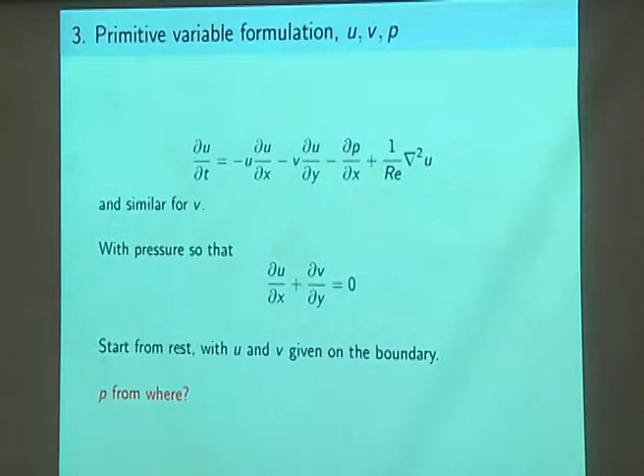So now we're going over to what's called the primitive variable. It's the original variables of velocity, u and v, and pressure; in this two-dimensional problem, just u and v. So you know the momentum equation. I've written it all out for u. There's the same equation for v. And the pressure, which is in the momentum equation, its job is to make sure the flow is incompressible.

Because we can think about compressible flows where depending on how much compression there is, you get a pressure. Pressure is a function of density and temperature. And so the divergence of the velocity is the compression or expansion, dilation, and that is what determines the pressure. Except there's not a local relationship, it becomes a global relationship. You need the whole pressure field that makes sure the divergence of the velocity vanishes at every location.

Okay, we start from rest. We know the boundary conditions on the velocity: 0 on the bottom and two sides, 0 for vertical velocity on the top, and a given tangential velocity on the top. So where do we get the pressure? Well, one answer is find an equation for the pressure. And we can find an equation for the pressure from the fact that the divergence vanishes, and so the divergence of the time derivative of the velocity vanishes. We know the time derivative of the velocity from the momentum equation.

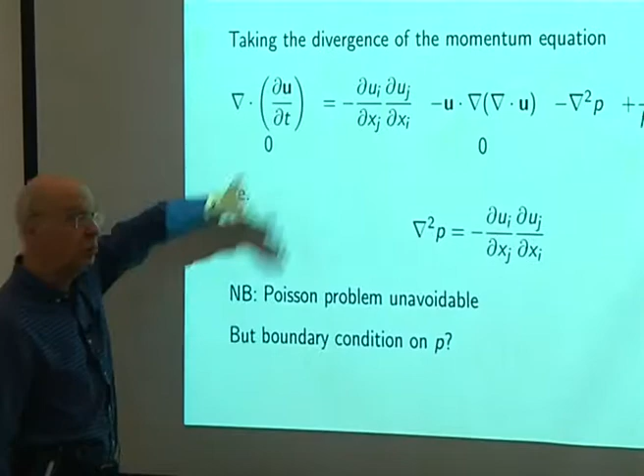So if we take the divergence of the momentum equation, we get a mess. So here I've got the time derivative of the velocity is u dot grad u, gradient of the pressure and del squared u. If I take the divergence, du by dt is easy. Divergence of the pressure gradient is del squared p. Divergence of the Laplacian of u, del squared u, is the Laplacian of the divergence of u.

And then there's the awkward u dot grad terms. When you take the divergence of them, there's going to be a u dot grad of the divergence, but then we have to differentiate also the first term, and that's what all this is with subscripts, the summation over i and summation over j. Now, so that's just the divergence of the momentum equation.

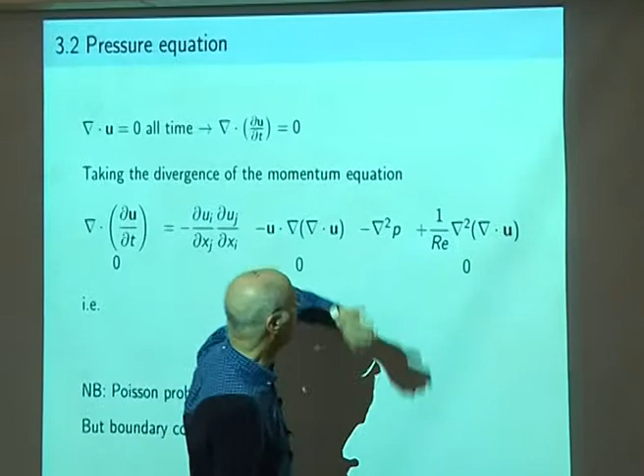We know the divergence of the velocity is 0. So we know the first term, left-hand side, is 0. We know the far right term is 0. We know this term is 0. So we've just got del squared of the pressure is this cross gradient, this cross product of the velocity gradient. Right, so good, we've got an equation for the pressure.

You notice the equation is a Poisson equation. You just can't get away from a Poisson equation. So in stream function vorticity, you've got a Poisson equation. In primitive variable, you've got a Poisson equation. And that's the thing which takes all the computer time. And it's unavoidable. Think of another formulation, and you'll have the Poisson equation there.

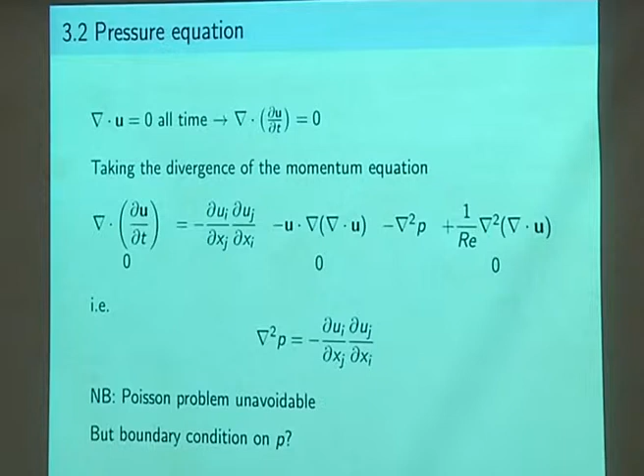So, right. So we've got an equation in the interior. What boundary conditions are we to apply? And you have to think about it carefully. And quite a number of people don't think about it carefully. So this is the answer: you go to the momentum equation and see what's happening. So let's look on, here's our square box, and we've got x and y. Let's look on x equals 0, this boundary.

On this boundary, we have no inflow, so u is 0 there, and u is 0 all the way along this boundary. What is the momentum equation at a point on the boundary? Well, here's the momentum equation: du by dt plus u dot grad u is minus gradient of pressure plus nu del squared u.

And on the boundary, x equals 0, u is 0. So the time derivative of u is 0. U is 0. The x derivative of u isn't 0. The velocity in this direction actually does increase away from the boundary. Well, it actually doesn't, but never mind. So I don't want to know.

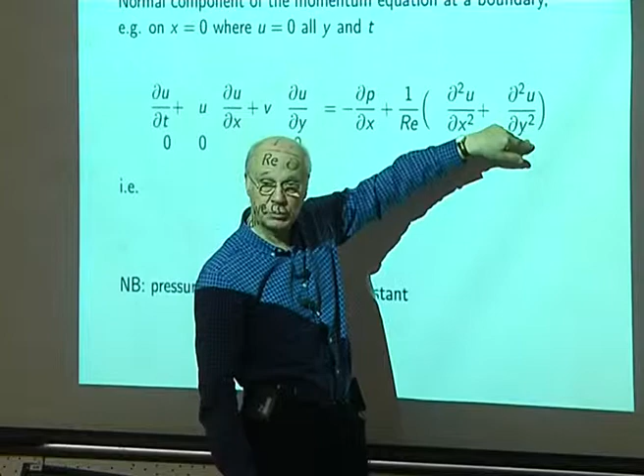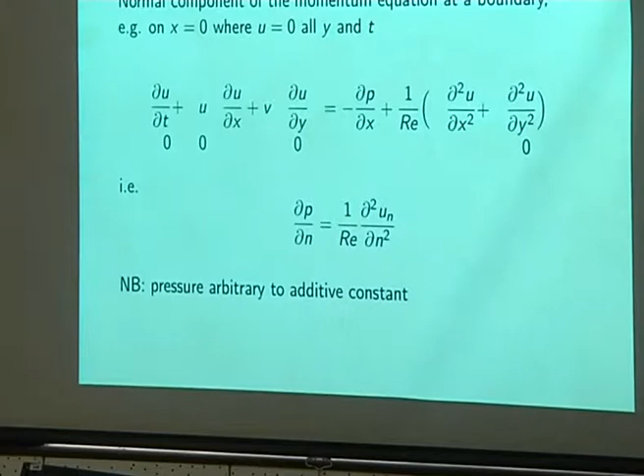This is 0. U vanishes at all values of y, and therefore the y derivative of u vanishes. Equally over here, u vanishes at all values of y, so the second derivative of u with respect to y vanishes. So I've got all these zeros, and what have I got left? I've got the pressure gradient and two x derivatives of u. So when we've put all those to 0, we've only got two terms left, these.

So this is the x derivative of the pressure out of the wall is equal to two x derivatives of u out of the wall. And in general, I've just done this one boundary here, but it's true of all boundaries where there is no normal flow. If u is the normal velocity, we can generalize this to the derivative of the pressure in the normal direction being equal to two normal derivatives of the normal velocity. That's what we've got in this particular case, and it's true on all boundaries where there's no inflow.

If you've got an inflow across the boundary, then you actually have to tell me the pressure. How hard are you pushing the stuff in? Okay, so here we've got a boundary condition. You notice it's a Neumann condition. It's the gradient of the pressure. I don't know the value of the pressure. Pressure equals 1 everywhere inside the box, nothing happens. Pressure equals 10, nothing happens in the box. So there's an additive constant.

And that's a little problem when you'd like to plot out the pressure. It will have an additive constant, which is arbitrary. So as a little technique, if you want to compare one calculation with another, one resolution with another, it's a good idea to find the average value of the pressure and subtract it, so that you choose the additive constant so the average pressure is 0.

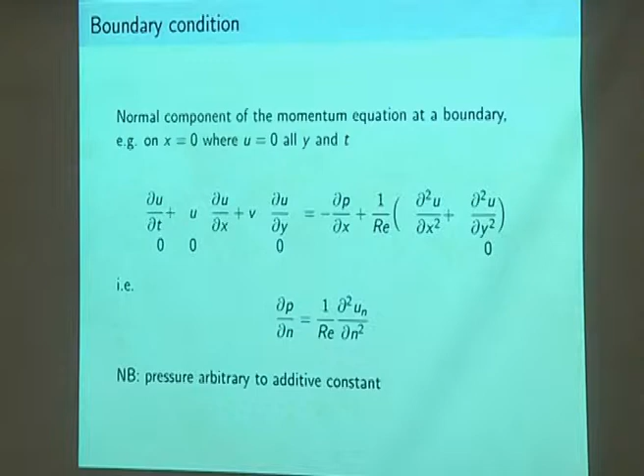Okay, so if we take that equation for the pressure, del squared P is du by dx, and the boundary condition, and solve that, what happens is a disaster. I'm plotting here as a function of time the error in satisfying div u equals 0. So we start with divergence of the velocity 0 initially, and it just climbs, and it goes to a non-zero value.

So solving the pressure equation with the pressure boundary condition gives me a flow with the divergence not equal to 0. It's a problem. The flow is also rather strange. It's not a flow that you can understand. The pressure field is pushing the flow around in a way that is not a proper way. Something's all gone wrong.

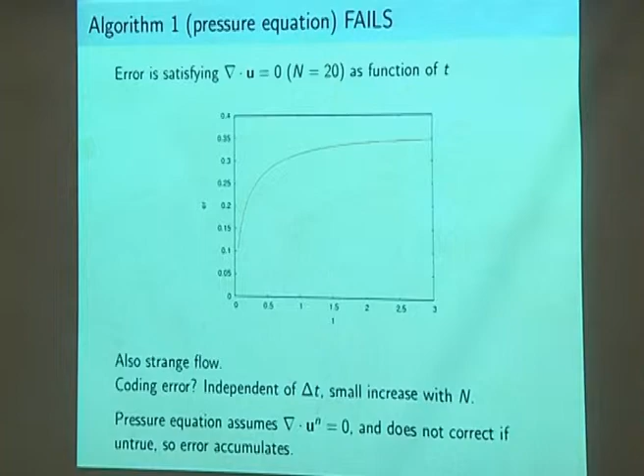So I thought, have I made a mistake when I first did this? Did I make a coding error? So you check the coding, no problem. Have I made a numerical error here? If I vary delta t, the answer ought to change. Doesn't. If I change delta x, does it change? Well, it changes a bit, but not by much, from 0.35 to 0.34. So we have a problem.

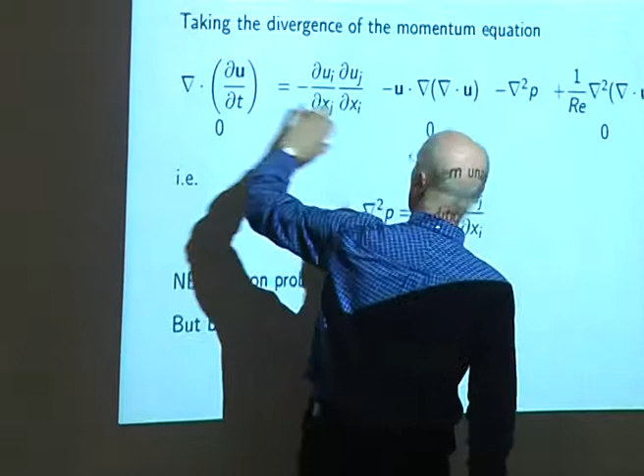The problem is that in our pressure equation here, we assumed div u is 0. Suppose we made a numerical error at some stage and it wasn't 0. This assumes it's 0 and it doesn't correct any error. So it actually has a nasty effect that the time derivative of div u is equal to del squared of div u. It may grow.

So if div u is 0, it's okay. But if div u isn't 0, then there's a problem. So little numerical errors have accumulated, and we get a nonsense answer. So that didn't work. Okay, so I have to think again.

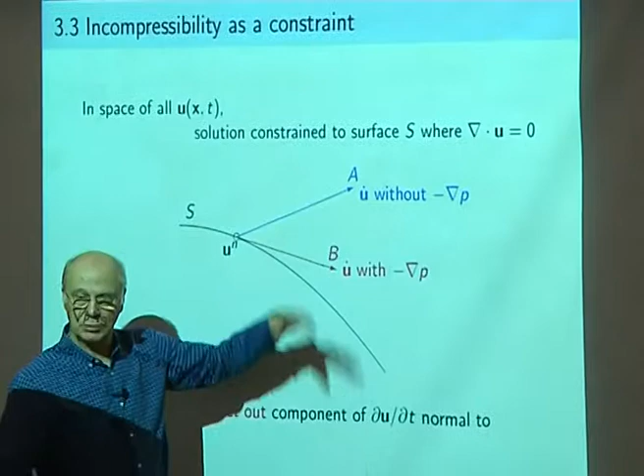And I mentioned at the beginning, the pressure field is the Lagrangian multiplier associated with the constraint of div u is 0. Let's think about it in a general sense. Out of all possible velocity fields, which I can only represent in 2 dimensions, there is some surface, some restricted set of velocity fields, this black surface here, where div u is 0. Off this surface S, the divergence of u is not 0.

So we start at some time level on the surface, hopefully, and then, without any pressure field, the time derivative of the velocity would take us away on the blue curve. And what the pressure gradient does is remove the component normal to the surface and put us parallel to the surface. So if we add the gradient of pressure, we move on the red line, which is tangential.

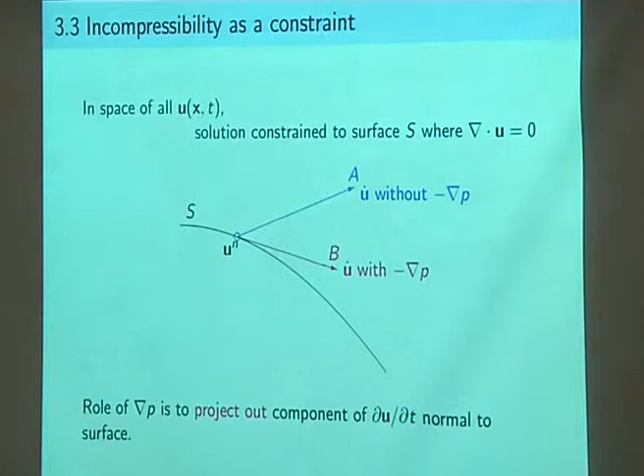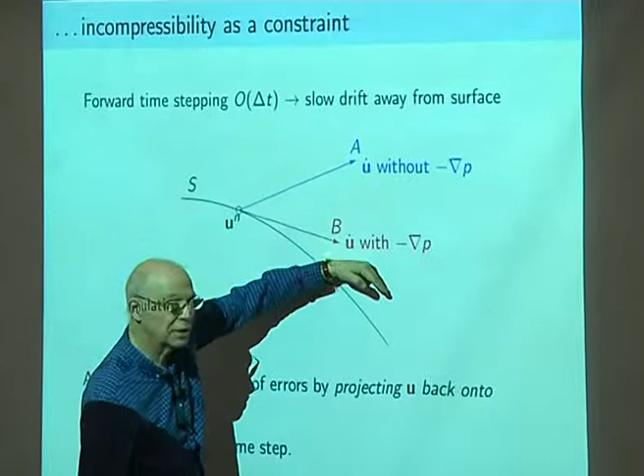So the job of the pressure field is to keep us on div u equals 0. Right, except if we have a first order time stepping method and we move in a tangential direction, we've come off the surface. And if we move in a tangential direction again, we slowly drift away. And we have to do better than that.

So just doing simple time stepping and getting the correct direction that's in the direction of keeping div u equal to 0 is not right. We want to come right back onto the surface. So this is point C. So we don't go off on the tangential direction. On this curved surface, we have to end up here.

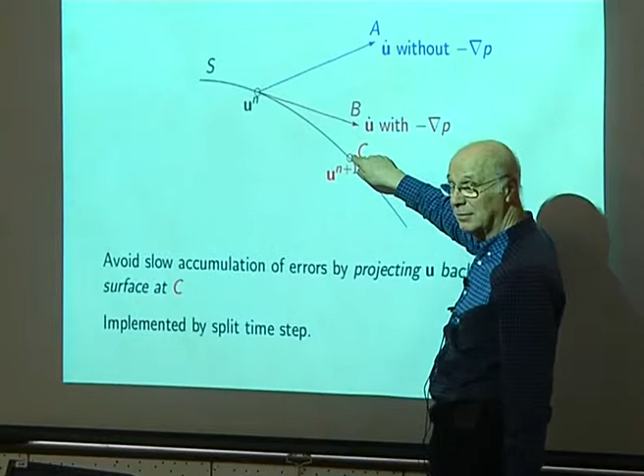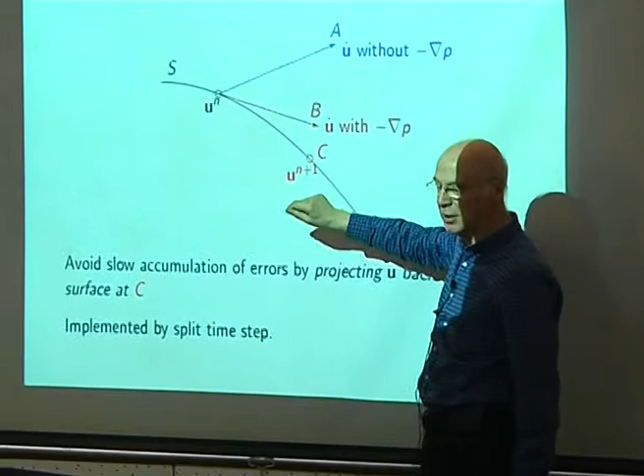So at the end of the time step, we don't mind even if we started off the surface. We have to make sure that at the end of the time step, we're back on the surface. So we correct previous errors. Okay. So that's the idea. And the way it's done is by a split time stepping method.

So you first make a time step from time level n, start over here. Time level n, you make a time step forward to this intermediate starred velocity field, which doesn't have any pressure field. This has just got u dot grad u, del squared u. The grad p is not in there. So we make a time step off the surface without the pressure. And then the second part is to add to this the time step associated with the

gradient of the pressure. And the pressure you want is such that the divergence at the new time is 0. So I ask that the divergence at the new time is 0. So this divergence, this is 0. Divergence of the starred velocity is not 0. And that's going to be del squared p. So we get an equation, del squared p equals 1 upon delta t, the divergence of the

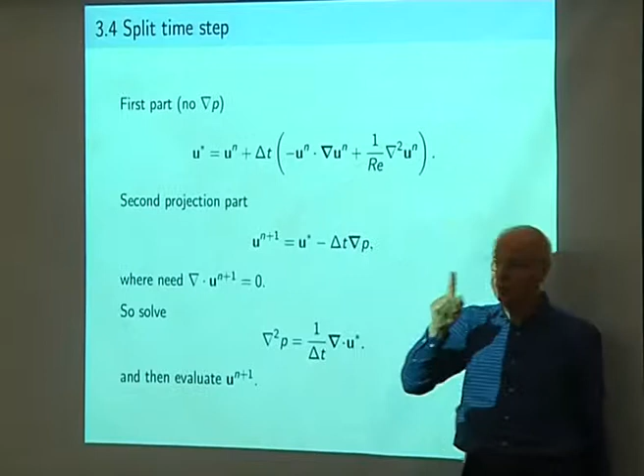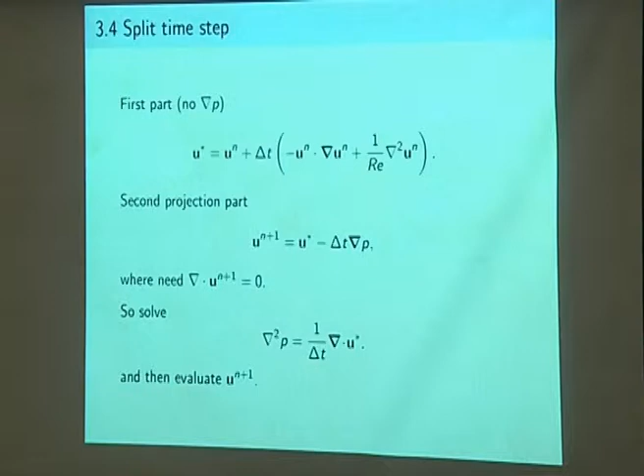starred velocity field. And if we can calculate that pressure from solving this equation, find out the pressure gradient, add it to the starred velocity, and we guarantee that divergence of time level n plus 1 is exactly 0. Okay? So this is self-correcting, previous errors get wiped out, and sounds great. Doesn't quite work, but it does eventually. This is a good idea.

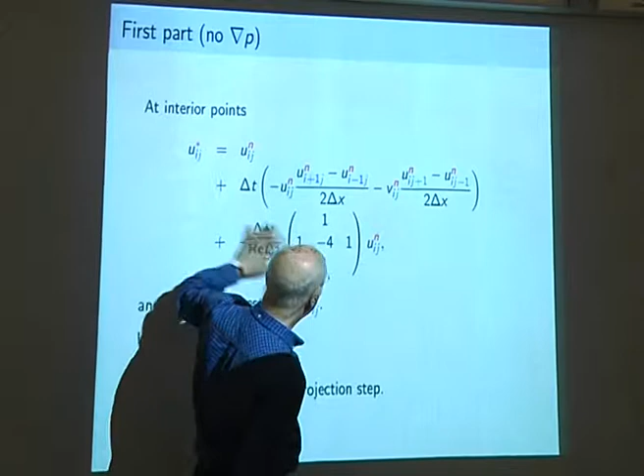So what we have to do is to work out del squared of the pressure. So here's the sort of code. It's getting slightly messy by now. So the starred velocity field without the pressure has u dot grad u, that's u du by dx, v du by dy, and then the Laplacian, this nice numerical molecule. So you can see here, the blue i's are the x variation. So this is the u du by dx, and then the green j's are the y variation. So this is du by dy.

Right. So let's get into the projection step. And then if we take that starred velocity field and work out its divergence, this is centrally differencing. This is the du by dx and dv by dy of the starred velocity field. That's the Laplacian of the pressure. We can solve the Poisson problem, and it sort of nearly works. The divergence of the velocity field that you get out of it at the next time step is nearly zero, but it's not quite zero.

So, to some extent, I originally said, well, this is wrong, because it was all designed to make the divergence at n plus 1, 0. It's only made a small error. There's a small error in the momentum equation. They go together. Let's live with it. But no, we're supposed to have done it exactly. So what's gone wrong?

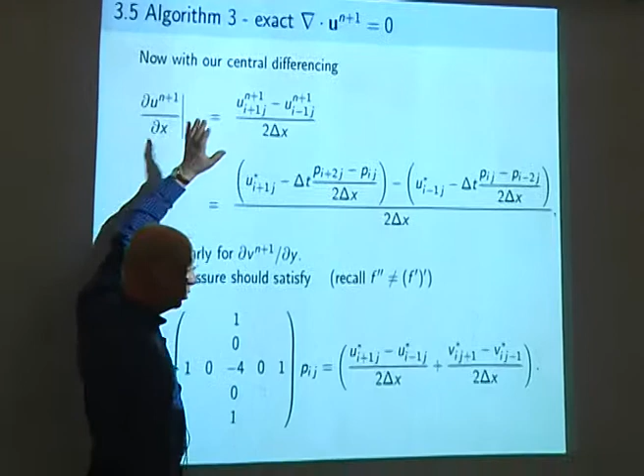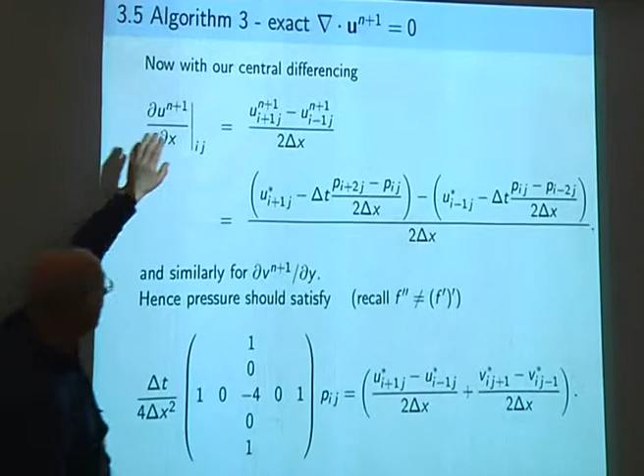Well, there are two terms in the divergence, du by dx and dv by dy. So this is du by dx, central difference. So it's i plus 1 and i minus 1 of the velocity at time level n plus 1. The velocity at time level n plus 1 is the star plus the pressure gradient term. This is the pressure gradient difference.

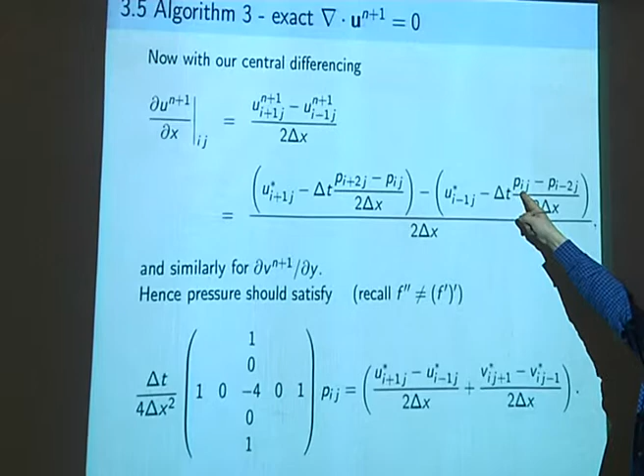And because I want the velocity u n plus 1 at i plus 1, I've got the pressure at i plus 2 minus the pressure at i to be central difference. To get the pressure gradient at i plus 1, I've got the pressure at i plus 2 and at i. And then the pressure gradient at i minus 1 is found from the pressure at i and pressure at i minus 2.

Okay, but you're supposed to follow this carefully. So to get the velocity at n plus 1, it's the star velocity plus the pressure gradient. And then I want this at i plus 1 and i minus 1. At i plus 1, the pressure gradient is i plus 2 minus i. Right. And there's a similar expression for v.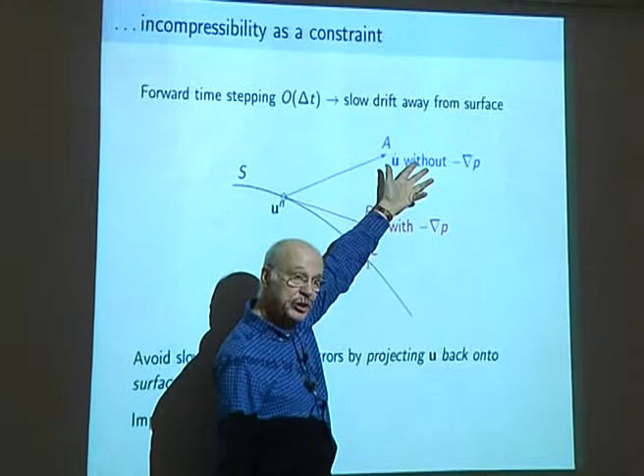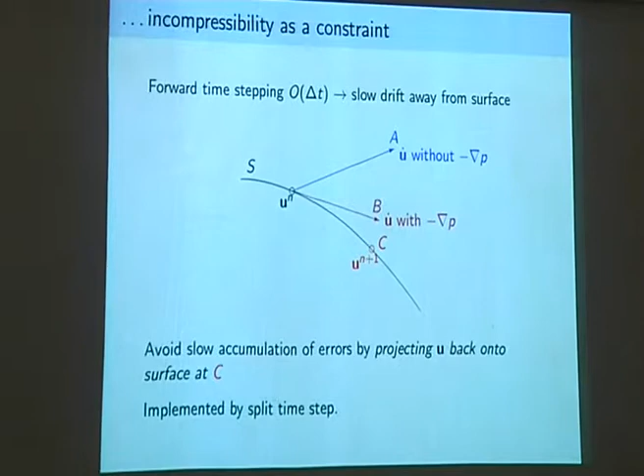So we first find out what the velocity is without a pressure gradient, and then we add a pressure gradient, not to be in the tangential direction, but to come down to here, which is div u, divergence of velocity at n plus 1, is 0. So the first one to star is to go from n and then make a delta t time step with no pressure gradient: u dot grad u and del squared u.

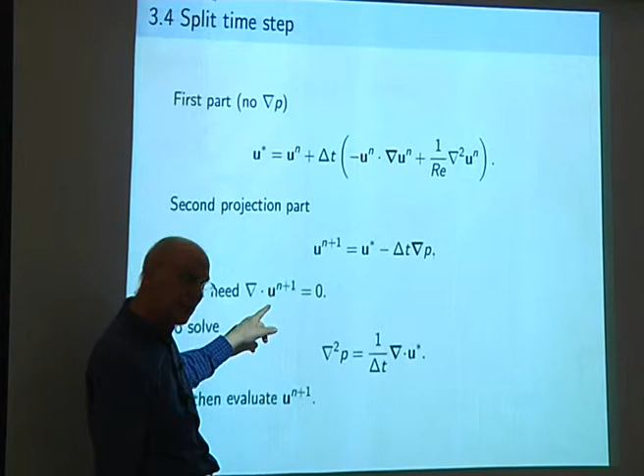And then the second step from star to n plus 1 has the pressure gradient in, and you choose the pressure gradient so that the divergence at n plus 1 is 0. Okay? And so divergence of that gives me del squared pressure, and this will be non-zero. Okay, so this split time step is the way of imposing the exact constraint. And because of central differencing, this one didn't, and this one does.

So this gives me the divergence of the velocity vanishes exactly, but it produces a mess. So the pressure field has got some pluses and minuses, and there are little pluses and minuses in the velocity field. And what has happened is that this numerical molecule has decoupled the even and odd grid points. So you can see that from the grid point of interest, we use 2 ahead. So if this is even, that's even, that's even, that's even.

So I'm solving the pressure field here on the even points, and if I shift ij along 1, I solve it on the odd points, and I get 2 disconnected pressure fields; they don't couple to one another. They just couple in the boundary condition. So that's the reason why I get these two disconnected solutions. Each of them looks quite nice, but if I plot them together, it's wrong.

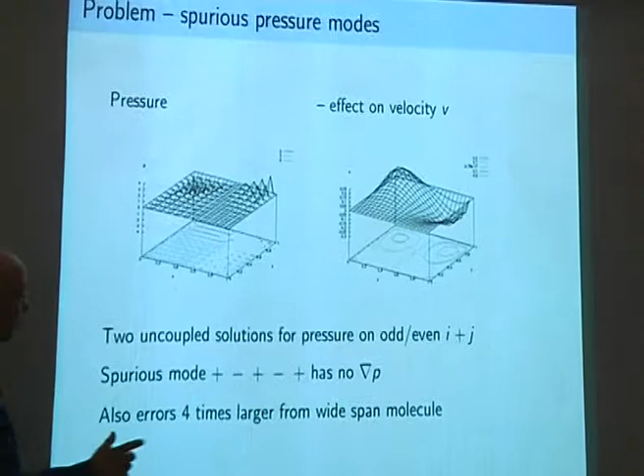And for a pressure gradient, I have this pressure that is plus and minus, plus and minus, plus and minus. When I do central differencing over 2, I get zero pressure gradient, zero pressure gradient. Of course, there's an enormous pressure gradient, but I can't see it with central differencing.

Right, so eventually we can get there, and we need a new idea, which is called a staggered grid. The problem with this numerical molecule is it's too wide. I really want to pull it in so the adjacent pressures are connected to me, rather than these odd and even disconnected ones. This pressure problem also has a problem at the boundary, because if you're at the point next to the boundary, this asks for something 2 points the other side of the boundary, 1 point the other side of the boundary.

So on the staggered grid, we have our mesh. There's a point ij, that'll be j plus 1, this will be i plus 1. And we don't have our unknowns, the velocity u, v and the pressure, at the grid points, but we think of them as being halfway up. So the horizontal velocity is in the middle of the box and is at j plus a half.

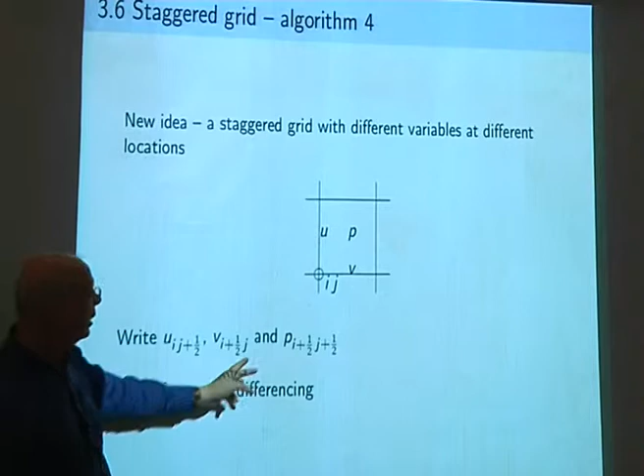The vertical velocity is coming in at the middle of the box at the bottom at i plus a half, and the pressure is in the middle, so that's at i plus a half and j plus a half. And that arrangement is quite good. The pressure in here and the pressure in here are just what you want for the horizontal pressure gradient.

The pressure here and the pressure here are just what you want for the vertical pressure gradient. The pressure here, here, here, and here will give me del squared pressure nicely. So it's all nicely set up for central differencing. And the divergence, that's the difference in the horizontal velocity and the difference in the vertical velocity, is all about the pressure in the middle. So the div u and pressure are sort of nicely all connected together. Okay, and this will give us a nice compact numerical molecule.

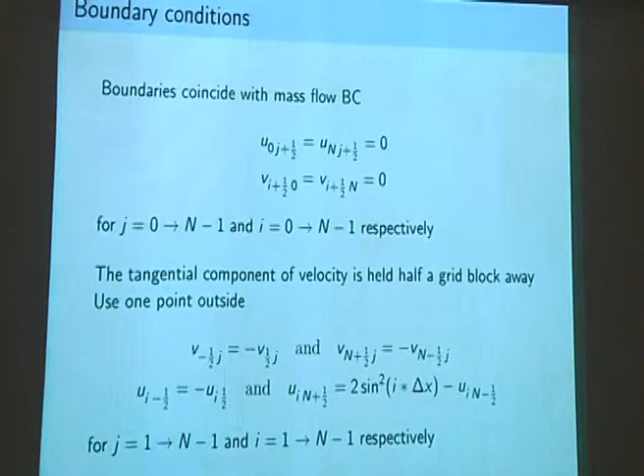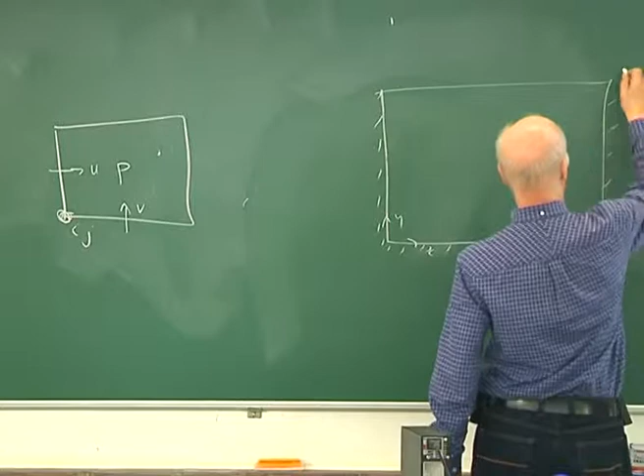Right, so we have this u, v, and pressure there, and on our square box there's a question of how do you fit the staggered grid on this square box, and the answer is the boundaries are the mass flow. So in fact we do have 0 here, and then we have boxes like that, so that the mass flow boundary condition is tackled as 0, u is 0 here, v is 0 along the bottom. There's a question of the tangential boundary condition, because the tangential boundary condition is half a step inside.

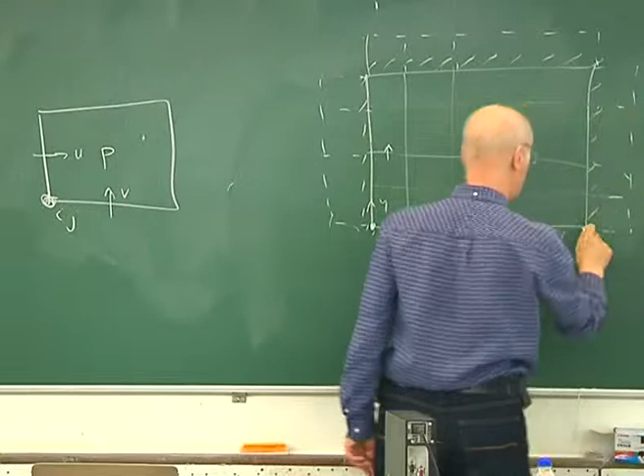So the way we can apply a boundary condition that is 0 is we invent a fictitious grid block outside, one grid block outside. We have some ghost cells. And I have a boundary condition that the velocity here is the opposite to the one there. So I have a boundary condition that v at minus a half and some level j is equal to minus the velocity at a half and j. So this one is the opposite velocity to there. So halfway in between the velocity is 0.

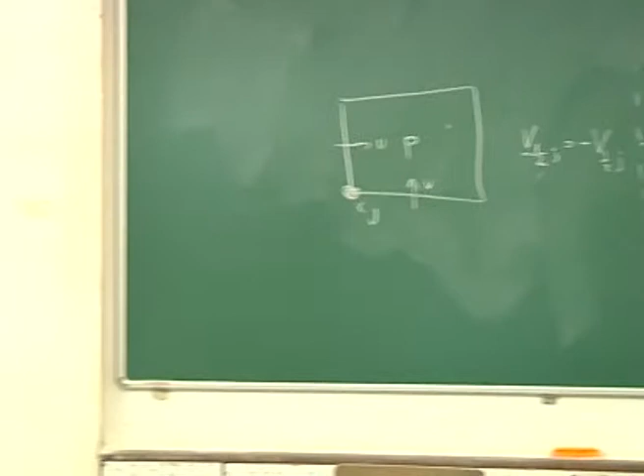So we have to do that all the way around. This is the no flux. This is the one I've just written down. There's one on the other side that the velocity down there is the opposite to the velocity just inside. And similar things on the top and bottom. Well, the top is different because you've got a boundary condition that there is a tangential velocity.

Okay, so we have this staggered grid. Remember, I have my indices going from 0 to n rather than 1. So you're going to be minus. You've got problems. I can have negative indices. Sorry about that.

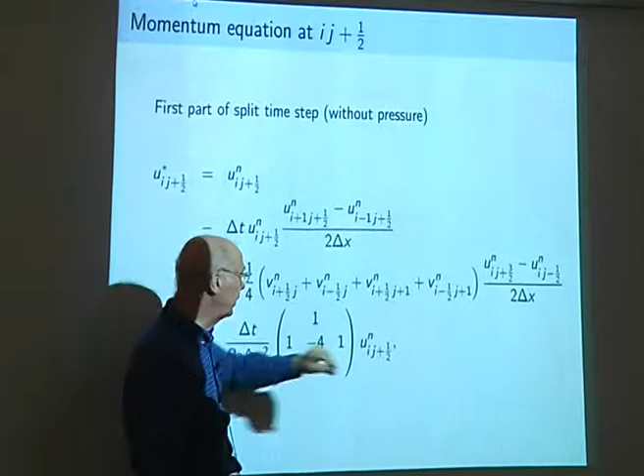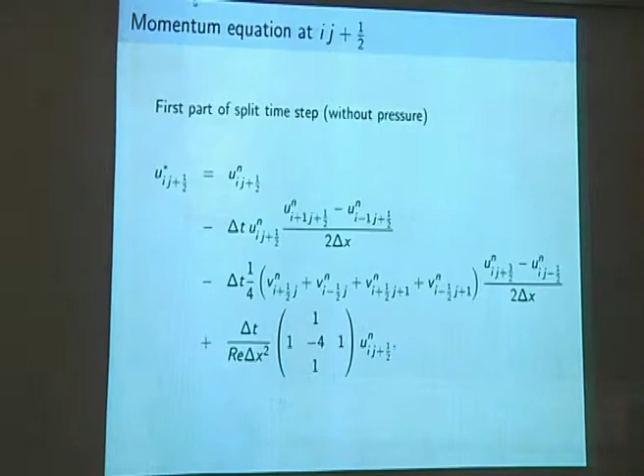Okay, so we've got this split time step. We make a time step to a starred state without any pressure gradient. And so that's the velocity at time level n, and delta t times. This is u du by dx. That's very easy. There's a problem with v du by dy. So here we want du by dy, so we've got u just above and below. That's easy. But the v, I don't have a v there. I have a v over there.

So I actually have to take the v there, there, there, and there, and average them to find the velocity there. So that's what's happening here. I've got a quarter of 4 v's to try and find out what the v velocity is there. There are other things I could do, and I should do, but I'm doing that. Okay? And then du by dy is easy, it's just the u.

They're not random, they're solving a flow equation. The v velocities are also solving equations. So at every point the v velocity will be different? Yeah, it'll be slightly different, because it's not random, it's according to what the flow is. His point is, what if the velocity is in some other direction? Oh!

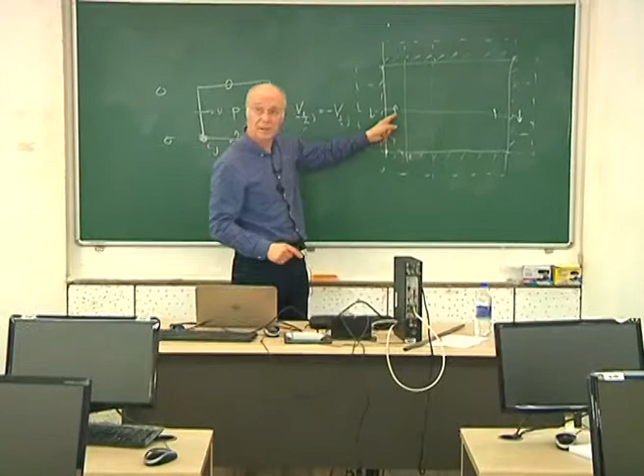So if we're here, I've got a u velocity here, but that boundary condition is 0. But I do have a u velocity going in that direction there. And I've got vertical velocities there, there, there, and there. I'm trying to say, please can the vertical velocity be 0 here?

And the way I do it is to say, have a point outside the boundary. The point outside the boundary is the negative of the one inside. And then the linear interpolation is 0 on the boundary. And I have at some stage to use that value when I'm doing these big averages and things like this.

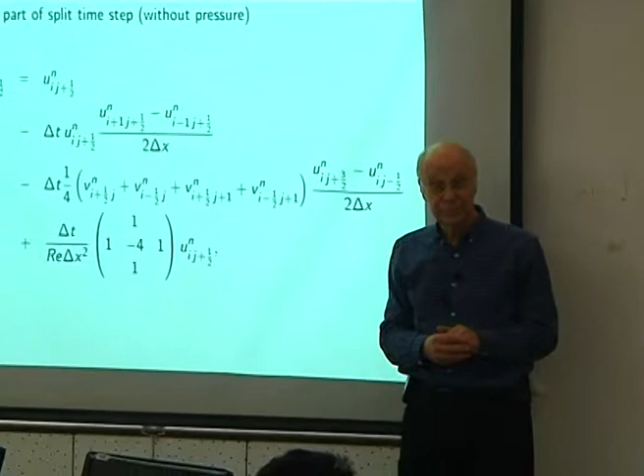Since the grid is very, very small, although these points are at slightly different locations, the grid is very, very small. You just take the vectorial sum of that and you get the direction of velocity. Yeah, this is all a little grid plot in a big flow.

This is the best I can do with first order. Well, this is designed to be second order accurate. If I'd have said v is 0 there, it would have been a first order error. But by doing this, I become second order accurate.

The primitive variable approach is complicated because you really do have to confront what pressure is doing. You do have to think about this projection. You choose the pressure so that you end up after a time step with 0 divergence. And then you're pushed into a staggered grid description in order to be compact. So it really is much more complicated than stream function vorticity. The commercial codes are doing this, don't worry.

So the incompressibility turns out to be nice. When you work it out, it becomes a nice compact operator. It involves just i plus 1 and i minus 1, j minus 1 and j plus 1, so that I don't get disconnected even and odd solutions.

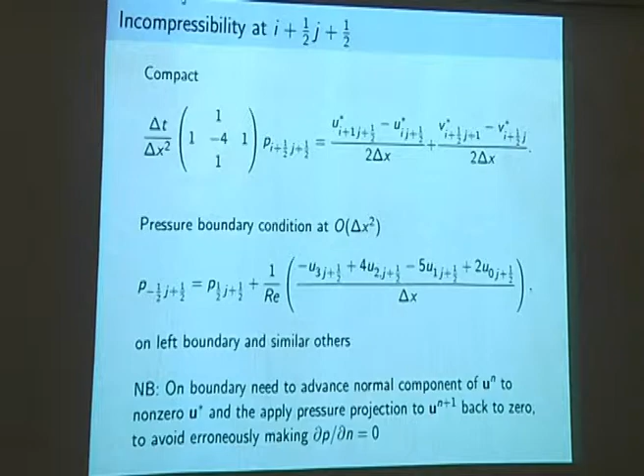There is a problem of getting the pressure boundary condition, which is the normal gradient of the pressure is equal to the viscosity, which is 1 upon the Reynolds number, times the second normal derivative of the normal velocity. So this is a second derivative I want on the boundary, and I don't have any points. For the velocity u here, I only have u velocities on the interior, and I want the second derivative.

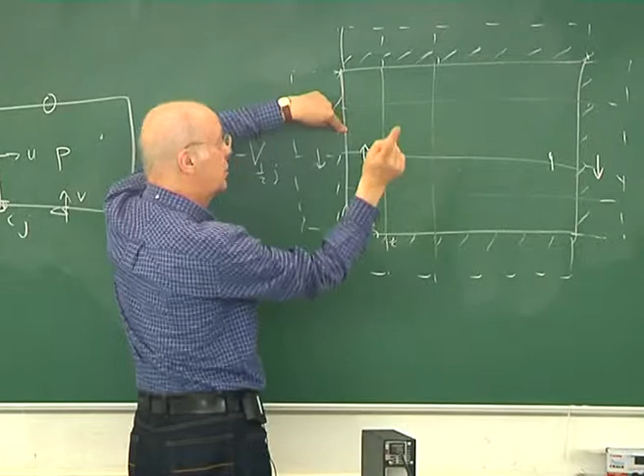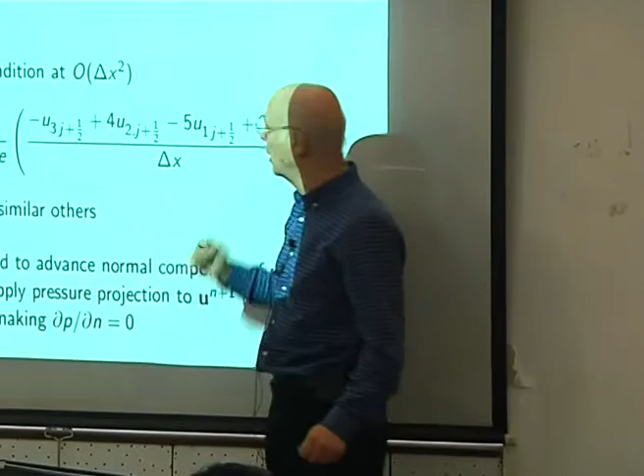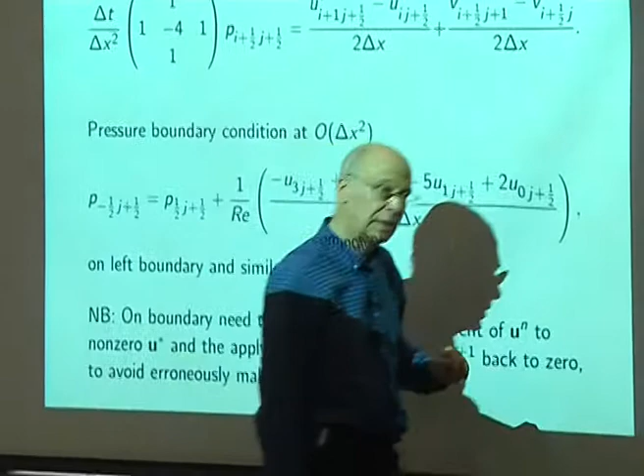So if I take these 3 points, I can work out the second derivative with central difference accuracy there, but that's not there. So I actually have to use 3 velocities to get a second order accurate estimate of the second derivative of the velocity. So that's why there's a big mess there. So it's taking not only the 0 velocity, but 1 velocity in, 2 velocities in, 3 velocities in, into the interior. It's a one-sided second derivative. Okay.

So when you write this, it does behave itself. The pressure field is nice. Divergence of velocity is 0. But it's not quite 0 right on the last square. And there is still one more thing you've got to do to get this right. Because of this split time step, we make a time step which doesn't have the pressure gradient, and then we correct it in the second step by adding the pressure gradient to get divergence equal to 0.

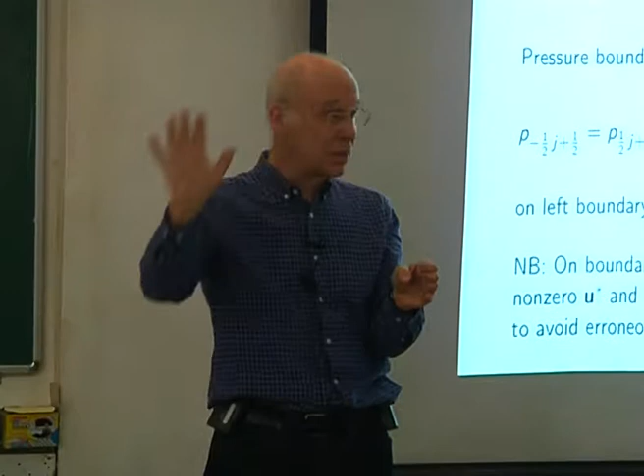The boundary conditions, we just leave the velocity u equals 0 there. But unfortunately, next to them, we're using a pressure gradient in the second step. So what you have to do is satisfy the momentum equation on the boundary and time step the u equals 0 on the boundary to a non-zero value, so you can then apply the pressure gradient to bring it back to 0. And when you do that, the divergence of u has been 0 on the interior, and it now becomes 0 on the boundary. So you're done.

I've not found any book that's explained this carefully. Someone asked about a book. I'm afraid there's no book that I like. There's a lot of books. If you're prepared to buy about 20 books and only read 2 chapters of each book, you can find everything I've said. It's quicker, you can find it on Wikipedia. If you know the key words now, you can find someone else's version of this. And I am translating all of these transparencies into a real book. 16 out of 17 chapters have been written. There's 1 to go. And there's some errors in it still that need correcting.

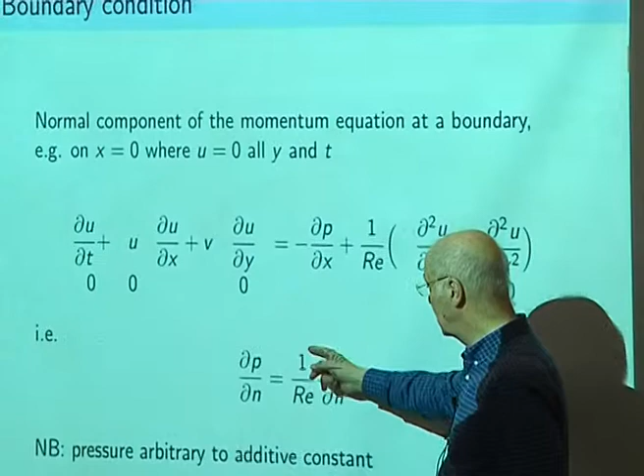Right. Yes? Yeah. Yes. Yes, you'll find lots of people say the normal gradient of the pressure is 0 in numerical calculations. It's wrong. You go and look at any analytic flow you know, Stokes flow past the sphere, the normal gradient isn't 0. Yes, this is the boundary condition. The normal derivative of the pressure is not 0, like many people use, but is the viscosity times the second normal derivative of the normal velocity. That's with no inflow boundary conditions.

Lots of people look at the split time step and say, well, we've got to arrange that. It's connected with what I was saying before. Many people look at the split time step where you make a first time step with no pressure gradient and then you add a pressure gradient, and realize that adding the pressure gradient will make the normal velocity non-zero. So to stop the normal velocity becoming non-zero, you have to make sure the pressure gradient is zero. And I'm saying, no, you don't do that. In the first part of the split time step, you make the normal velocity non-zero, so that the pressure correction will put it back to zero.

Okay? And it's a sort of delta x error, erroneously putting the normal pressure gradient to zero. Well, it's worse than that. Just look at an analytic solution. You find me a flow with a normal gradient of the pressure zero. It has to be inviscid. We're nearly finished. So it is very painful, the primitive variable. You have to really understand what pressure does, and then you're into these staggered grid considerations. But then it does work.

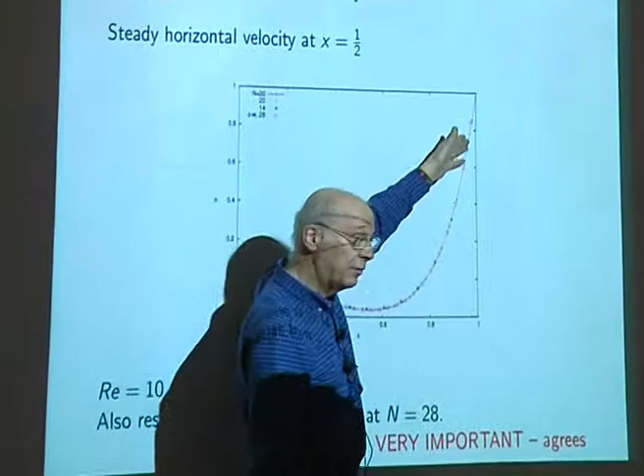So this is my velocity on the mid-plane. So at x equals a half, the top is going one way and the bottom is returning negatively. Most of the flow is actually negative. There's a very high velocity next to the wall going in the positive direction, and then there is a much smaller velocity which, to have the same amount of mass flux, has to be spread over a deeper region for the return flow. And those are the solutions of grids.

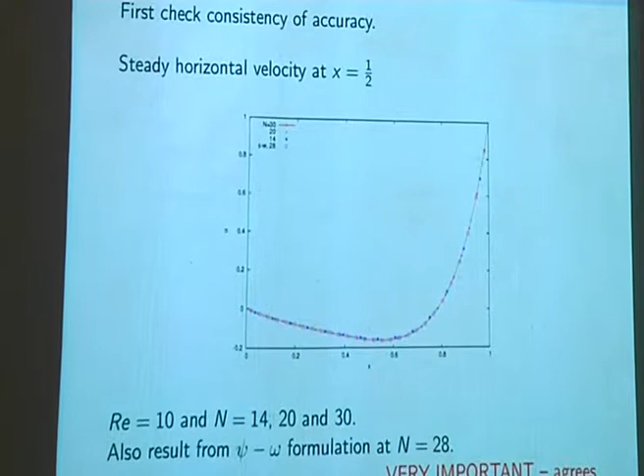I can read the scale. The red line is 30 by 30. The green dots are 20 by 20. The blue stars are 14 by 14. And they all superimpose near enough. And in addition, the red squares are the result I had first thing this morning by the stream function vorticity method.

And that puts you in a very powerful position if one code based on stream function vorticity gets the same answer as another code, a totally different code, agreed written by the same silly person, but the different code produces the same answer. Okay, it might be right now. Okay, we have something new. We have the pressure, which we didn't have with the stream function vorticity.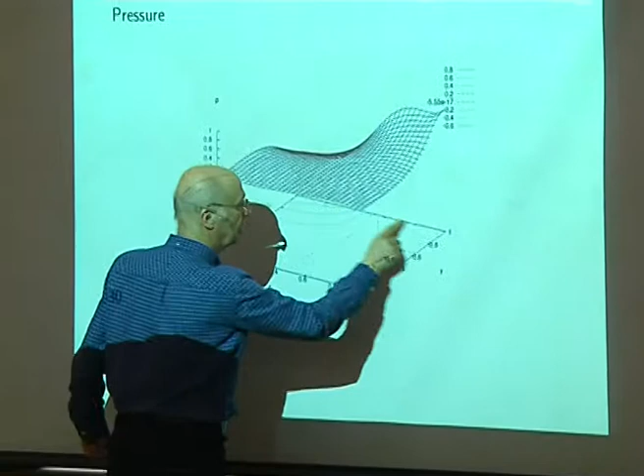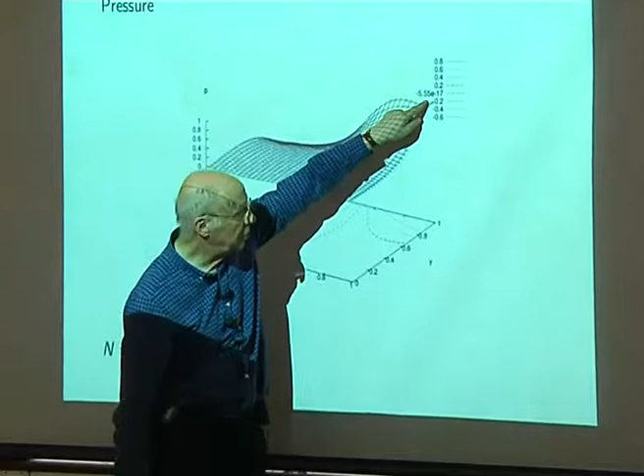So this is x is 0 here, and y is 0 along the bottom. The top plate is over there. I'll do it on this one over here. This is the top plate over here. This is y equals 1, going from x equals 0 to x equals 1. And you can see that there is a negative pressure at x equals 0, y equals 1, and there's a positive pressure at y equals 1, x equals 1. So we have this square box, and the top is going this way, and we have a plus pressure in that corner, and a minus pressure in that corner.

And you have to think, is that sensible? Well, it is, isn't it? So here we have this box. There's a plus pressure up here. That's because you're sending flow at it. It's got to go somewhere. The pressure has to make sure the mass flux is sensible. So you have a high pressure up there to push it down.

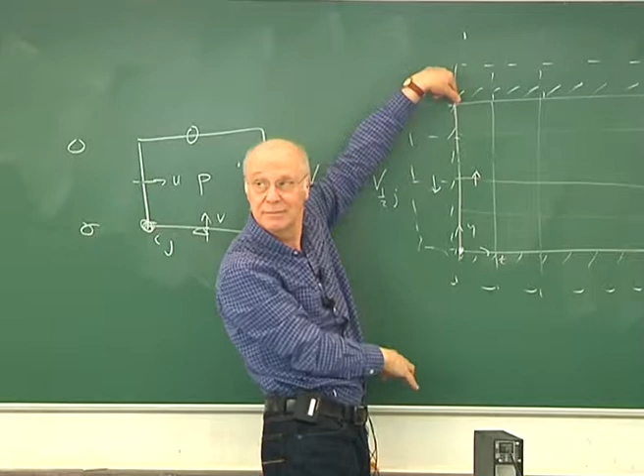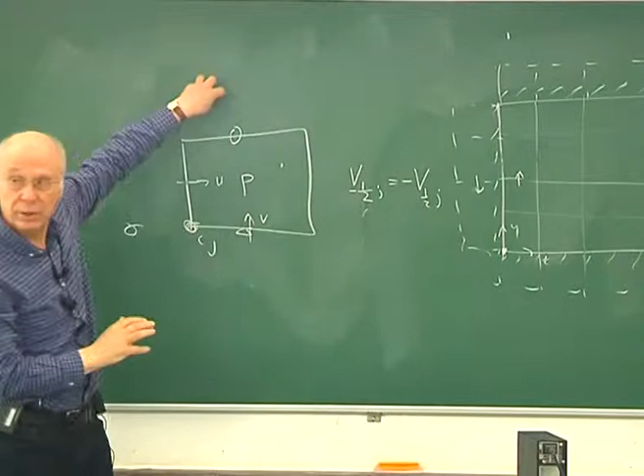Equally, up over here, on this other side, we have a negative pressure. We've got flow going sideways. You've got to supply it. You've got to suck it up with a negative pressure in that corner. So that's why we've got a negative pressure over there and a positive pressure over there. So that sends them like that. And then there's a little problem. We've got to reverse the flow underneath.

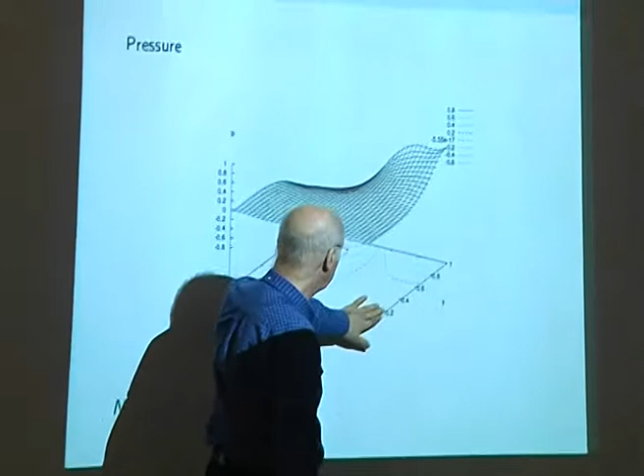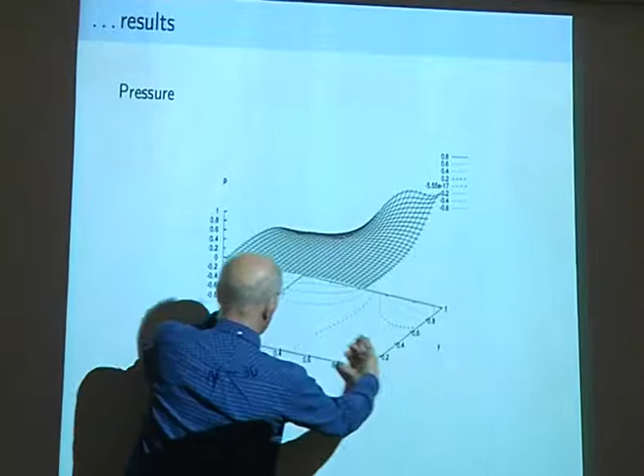So there is a very small, no, there's not. It's still positive over there and negative over there. Oh, that drives the return flow. Okay. So the positive pressure on this side and the negative pressure on this side, it's not much of a pressure gradient, will drive the return flow along the bottom. And it's the wall on the top, rather than the pressure gradient, that's driving the flow sideways on the top.

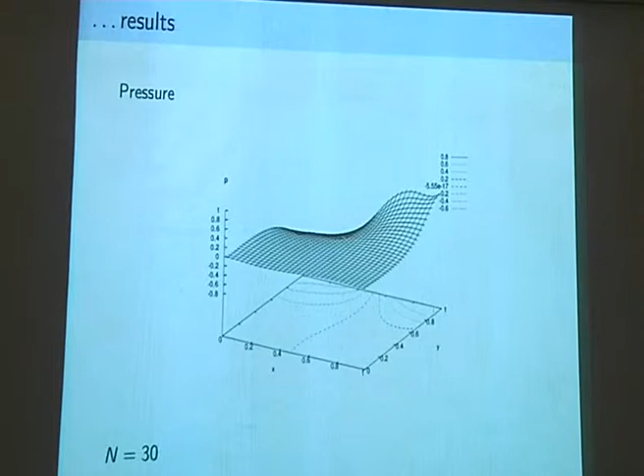Okay, get some numerical answers, try and understand it quickly to make sure, is that a test, is it? So I didn't tell you, but there's all these accuracy tests, and I've done the accuracy tests on this code. And I know this time step stability criterion as well. So I've done all those routines, because I always do them. And to calculate the force on the lid, we want to have the tangential stress, the viscous tangential stress.

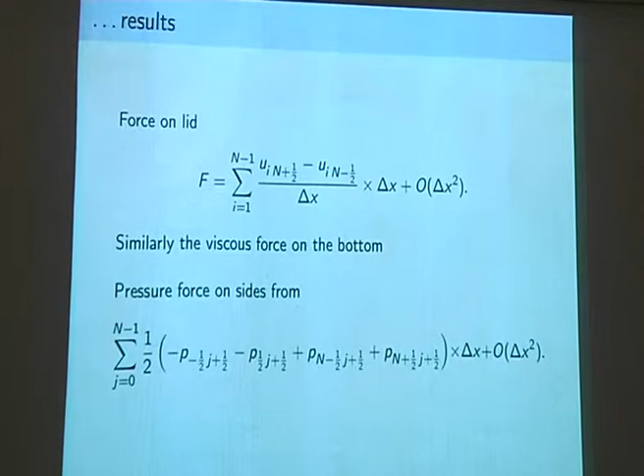That's easy because we want to have the y derivative of the velocity, and on my staggered grid here, that's all lined up. So here we have a horizontal velocity. We had a boundary condition that the horizontal velocity was minus here, so we have no slip. Well, we don't have no slip. There's plus the prescribed velocity there. But from the difference of those two, I can work out the gradient, central difference on the lid itself. That's very good. So this is my velocity at the ghost point outside, minus the point just half a step inside. That will give me central differenced second order accuracy.

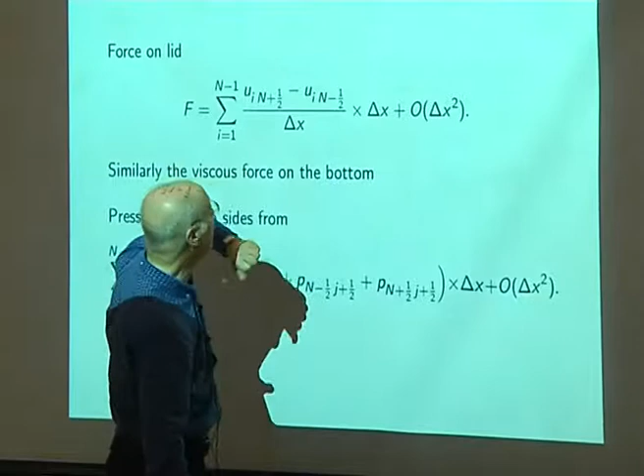And then I want to sum all of these, so I integrate by multiplying them by delta x, that divides by that there. And I can also work out the viscous force, which I didn't do on the bottom. And there's something new, because we've got pressure forces, we can work out for the horizontal momentum equation: what is the pressure? We're driving this, what's the pressure on this side and the pressure on this wall?

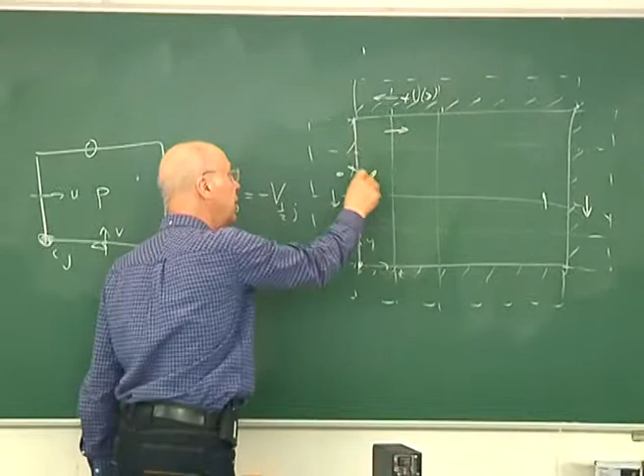So the pressure is at a staggered point, so I actually need the pressure here and the pressure here and take the average to find the pressure there. So I can work out the pressure force there, pushing it in the negative direction, and the pressure there, pushing it in the positive direction. So this is the positive pressure, that's the negative pressure. So we've got the pressure gradient.

So when I come to this calculation of the force as a function of the numerical resolution delta x squared, the red curve is the viscous force on the top. The blue curve is the sum of the pressure forces on the sides and the viscous force on the bottom. The viscous force on the bottom is about a quarter. The viscous force on the top is about 4.

So there's not much viscous force on it, but there's quite a significant pressure, because actually the sum of the viscous force on the top, bottom, and the pressure forces has to sum to 0, because the momentum inside the box isn't increasing. So they don't quite agree because there are numerical error differences, but there's a very small difference between the force on the top and the force on the walls and the bottom.

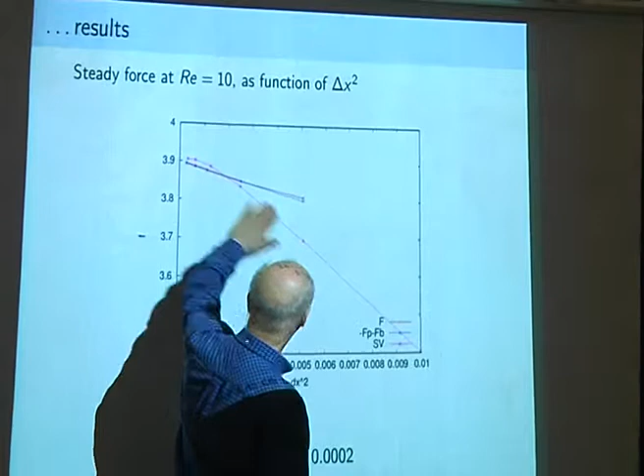And the purple curve is the stream function vorticity result, which at the coarse resolutions is not very good, at the fine resolutions is, and they are roughly linear. And I can extrapolate to get about a 4-figure accurate answer for what the force is on the top and the force is on the bottom. Okay. So, there's a lot there. Does someone want to ask a question which will make me explain it better?

They're wrong. So they're wrong to say the pressure gradient is 0 there. You can ask, if I have a box and I'm solving Laplace's equation and I put the wrong boundary condition in, how much does it change the answer? It tends to change the pressure over here a little, a few percent. So you can probably tolerate that.

They do have to confront the fact that they're wrong. You just look at an analytic solution, it's wrong. The analytic solution will show you the pressure gradient at the boundary is not 0. If you impose the pressure gradient is 0 on the boundary, you've done something wrong. What happens when you have an inflow boundary condition? If you have an inflow, you have to tell me what pressure you are applying to push it in. And then I have a pressure boundary condition.